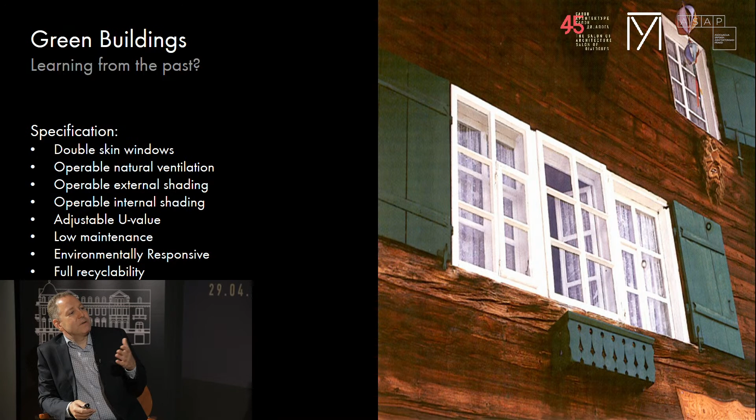You have low maintenance. It's relatively simple technology. It is environmentally responsive. It's all made of wood and simple glass. Almost full recyclability, at least of the metal parts, and biodegradable in terms of the wood. So if you put this specification down for a modern facade system, a lot of contractors would fail.

So it's a bit of a question: can we pick things? Can we learn from the past?

Also looking into the CO2 emissions from such a building—usually they had a kind of barn, or they had animals. Usually the animals were in the basement or ground floor, then the living rooms or bedrooms were above. So the heat from the animals, the cows, pigs, whatever they had, was going up—it was natural heating. They were very smart in positioning: where's the barn, where are the people?

Now this whole building was run with one single stove in the center. So people were sitting around—maybe this laser thing goes here—sitting around the stove. They just had one fire heating up, or more or less heating up. Still not the thermal comfort that we would have nowadays. But this building was so environmentally friendly, I think nowadays we would struggle achieving that.

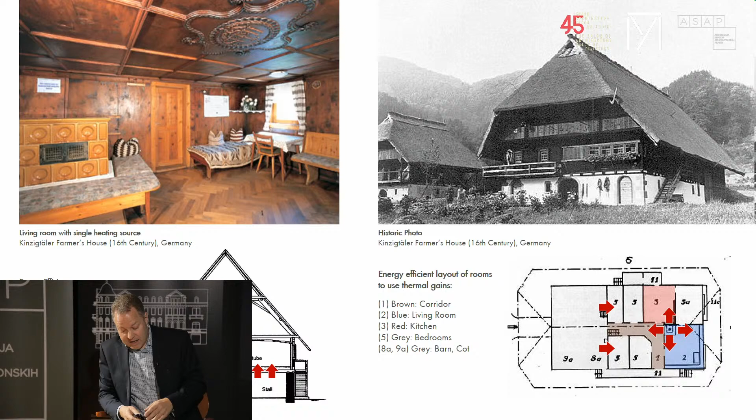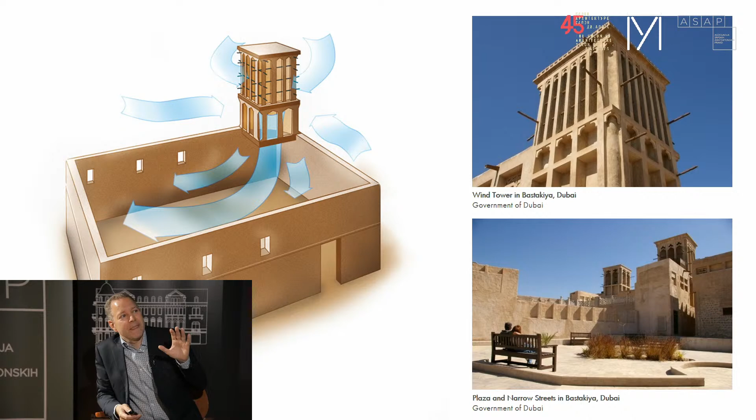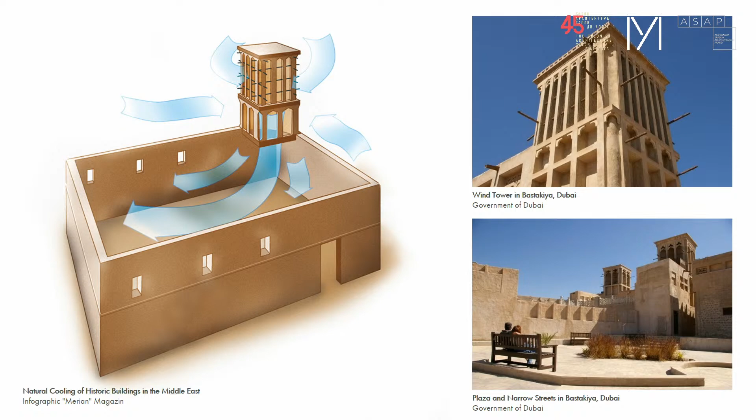So going from cold climates like Central Europe to hot climates, what did people do there in the past? Very similar approaches—it was about understanding nature, understanding physics. What can we do to enhance the thermal comfort of human beings? This is quite key also for nowadays design. If we want to make things better, we need to understand how the human being works.

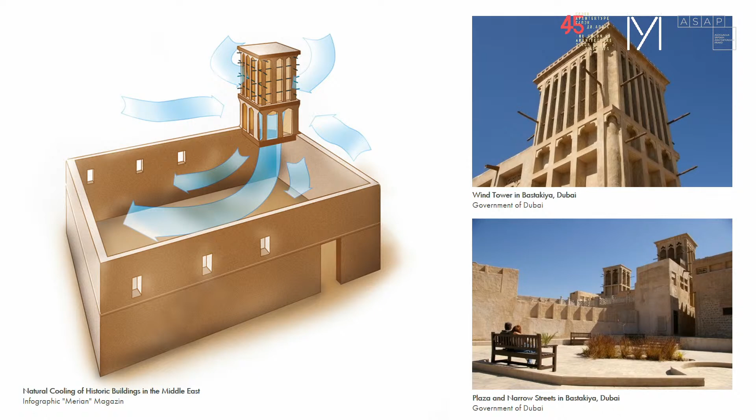This is an example of the traditional wind towers built in the Middle East. During the summer, it is extremely hot, so you're trying to harvest the wind, collecting it from a higher altitude, bringing it down into the traditional arabic courtyard. This wind flow makes it at least a little bit more comfortable in terms of thermal comfort for the people. Low tech, built centuries ago.

About shading, they didn't have glass in the past, so they did this kind of so-called mashrabiyah screens. The mashrabiyah screens provided privacy and let air go through the screen, continuing this idea of wind flow.

In the old Arabic cities, the buildings were built very close next to each other, so the pathways were shaded. It's about shading. It's showing that people in the past had an understanding of how they could make the world a more comfortable environment.

This is a very nice graph that I like to see. It's shortly about, during the Second World War in the United States, they did some experiments about thermal comfort of human beings. This graph also throws me back to when I was doing presentations, for example, in Saudi Arabia, about sustainability.

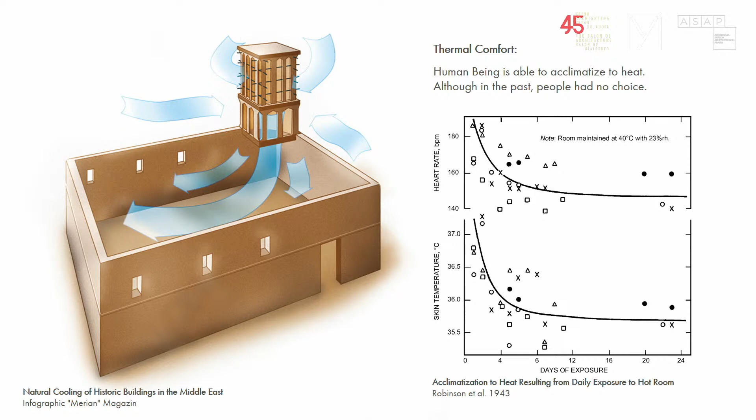There were some old local people from Saudi Arabia standing up and saying, oh, this sustainability, air conditioning, is all modern, we didn't have it in the past. So people survived without air conditioning in hot climates in the past. How did it work? Nowadays, people would complain immediately.

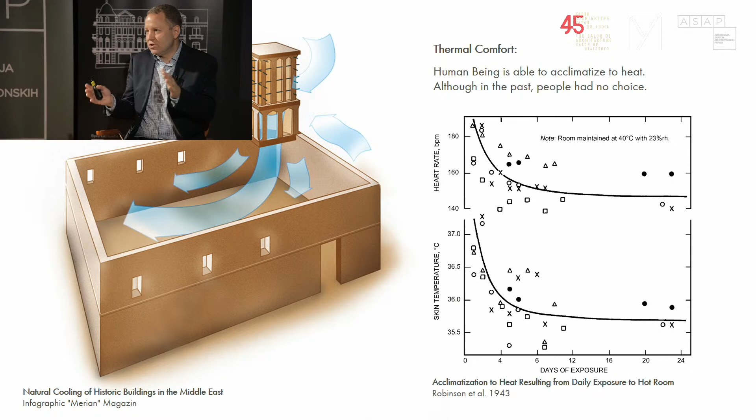This kind of graph shows people were put by the US Army into a kind of climate chamber, a big room, and the room was actually heated up. You can see on the left-hand side the skin temperature and the heart rate, and then the days of exposure.

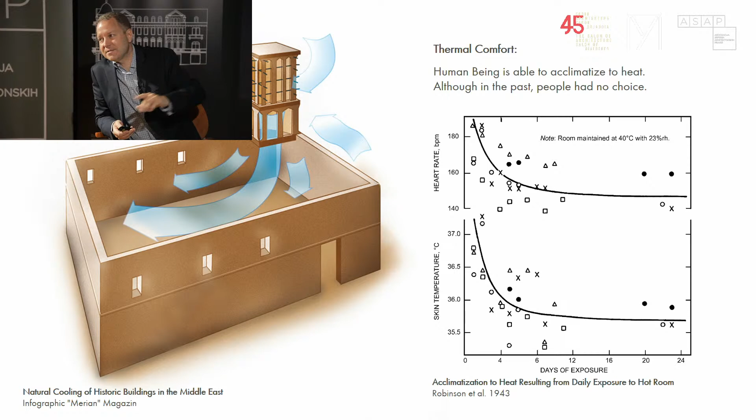You can see that the first 4 to 6 days, people were stressed out, so the heart rate was high, you were sweating. But then human beings are able to acclimatize, so your human body acclimatized to high temperatures, the same also for cold temperatures.

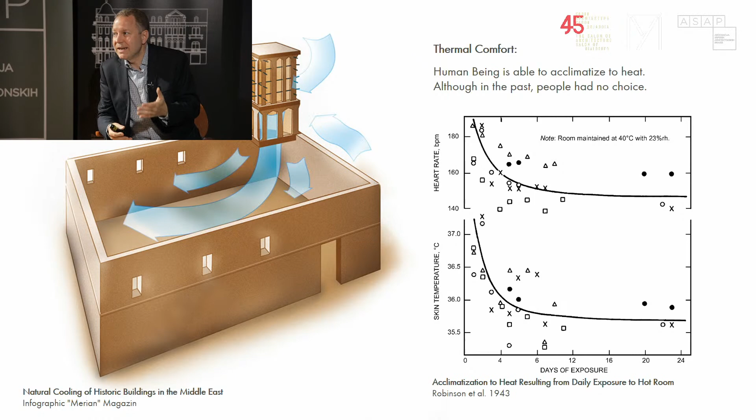This is how the people survived in the past, because you just have to pass through 4 to 6 days, and then your thermal comfort is getting better. But nowadays, people are no longer willing to do it. People are sweating immediately.

Air conditioning in your car. You drive your car, oh it's hot, air conditioning; it's too cold, switch the heating on. So people in the past were more willing, or more used to withstand heat or cold. This is quite important to understand.

So we as human beings, we could go back to these kinds of designs, but do we want to? This is another question, a bit more about our society.

Now taking the steps further, learning from the old traditions. This is a project in Riyadh that we just finished the design on. In Saudi Arabia, we see a lot of movements nowadays, they're building a lot of new houses, new cities, because the population is quickly growing.

In these hot climates, we try to achieve a more comfortable outdoor climate. This design involves a huge shading canopy with integrated wind towers to create outdoor thermal comfort so that people can walk along the streets, even in the summer, more or less comfortably.

You can see this whole design, a complete new kind of city, or half of a city that's built. Between the buildings, between all the retail shops, houses, and so on, we want to go away from this car society, because currently in the Middle East everybody's driving a car because it's hot.

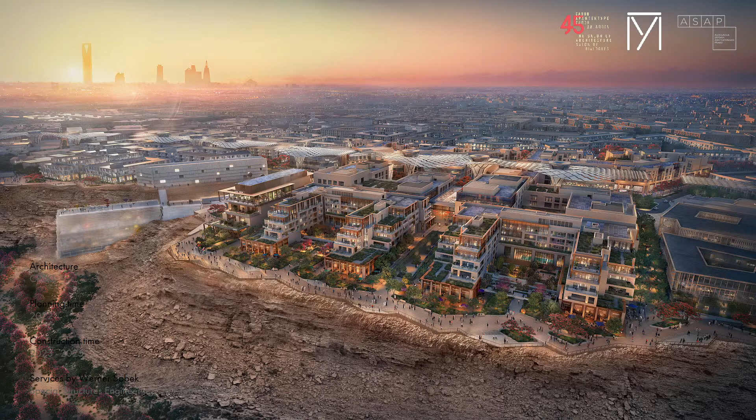But if we achieve that, we're getting the buildings closer again, so that you don't need cars. Then people are able to walk outdoors in a thermal environment that is comfortable, even in the summer, with less sweating — then we achieved quite a lot.

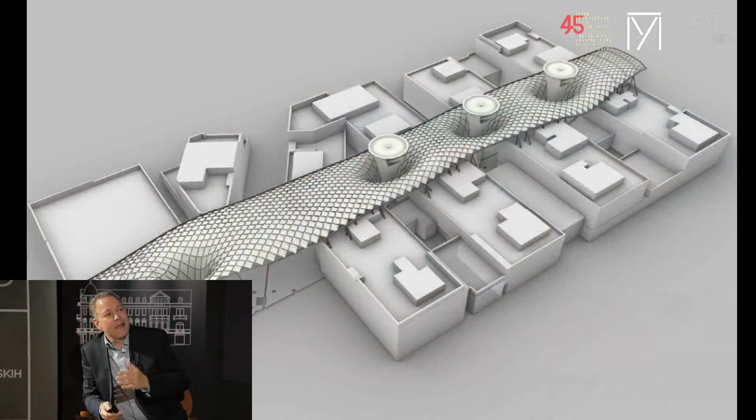This design involves wind towers, which are cantilevering out from the ground, getting wider at the top. They're collecting the wind from the two main wind directions and funnel this wind down. At the same time, we have this kind of shading canopy to provide shading. In terms of design, we designed this big grid shell structure between the buildings, supported on the buildings.

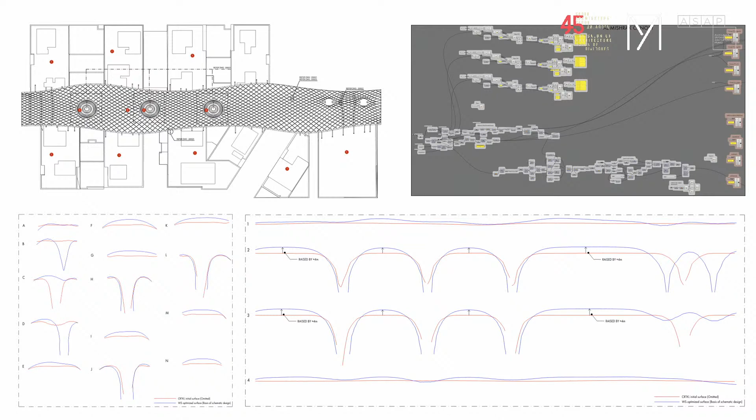Going to the next slide, it shows a bit of the technical complexity behind these things. If we do design nowadays, especially for freeform structures or these kind of shapes, we optimize them first architecturally. The architect has to say how the geometry looks like. But then we also want to build an ideal grid shell structure, ideal arches, so we modify the geometry for a structurally more optimized result.

All of this is run in parametric scripts, so we're fully working in Grasshopper with Rhino, because otherwise these kinds of structures in 2D you cannot design. We call this approach CAD to CAM, computer-aided design to computer-aided manufacturing. This involves that nowadays we even pass on the 3D models from the designers, the architects, the consultants, to the contractor.

We did certain studies, and with the help of a CFD consultant, we've seen at which times, at which times of year, we are enhancing the outdoor thermal climate. You have to be realistic—you cannot achieve that the whole summer in the Middle East becomes nice with these kinds of things, but we are actually enhancing it.

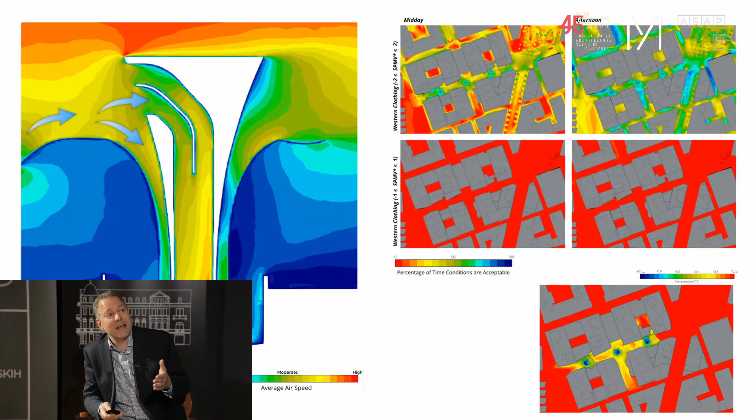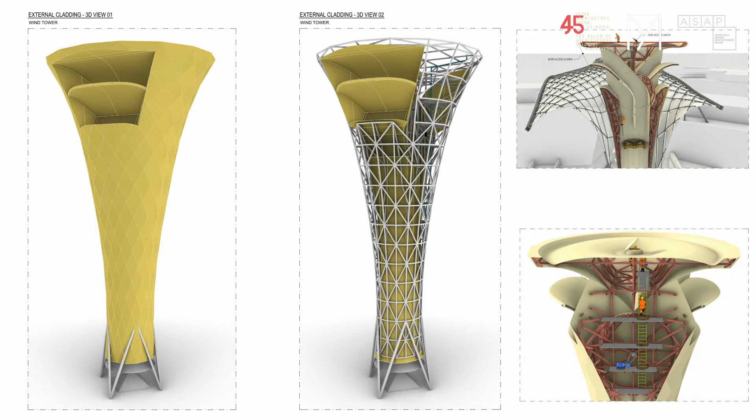Within these wind towers, at the top right corner—not shown here—we even included fans in case there's no wind flow at ground floor. So we included electrical fans to create artificial wind, blowing air down. At the same time, we have water spray systems included in these wind towers, using so-called evaporative cooling. We spray water mists into the airflow, and the natural effect of evaporation cools the air down. It also slightly increases the humidity levels of the air, but it's working.

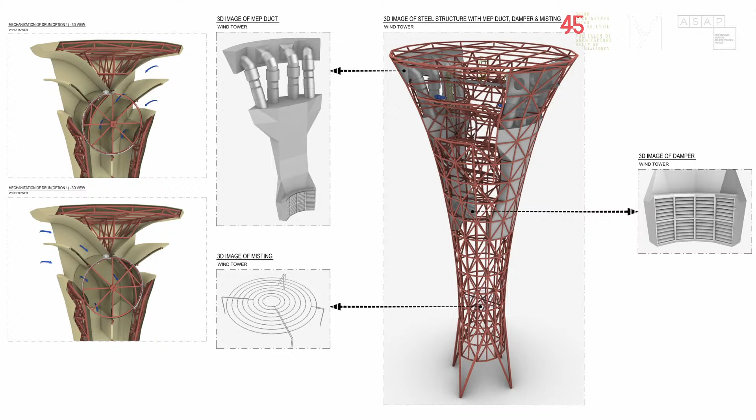This involves us having to scratch our heads because all of this is unique—no one has built it before. This is where we, as ASAP, step in and take on the challenge to design these unique things. We designed all of the mechanical parts, the rotating drum, the mechanical equipment, the steel structure, so that we were able to pass on the full design to a contractor to build it.

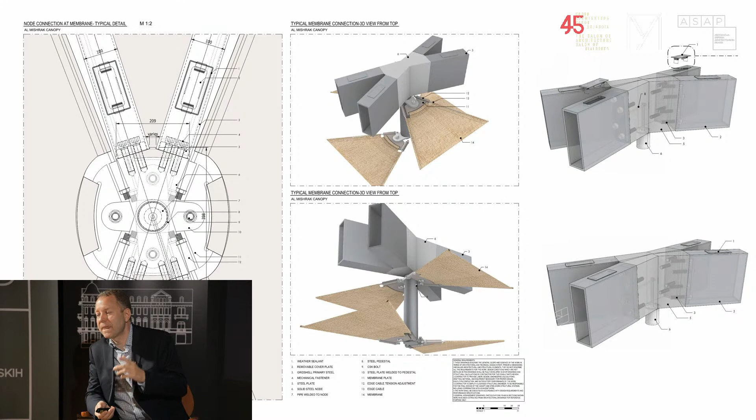Talking about the shading, as I mentioned, it's a shading structure. Usually our grid shells need to be lightweight because we're talking about big structural spans. This grid shell has a span of over 60 meters, a 60 meter clear span, and we're realizing this clear span with a steel box section of 300 millimeter height. So the span to structural height ratio is amazing, but to achieve this we need to be efficient.

We need to be efficient, first of all, in terms of weight of the materials, and the most efficient materials are, of course, tensile structures. So we used fabric, stretched fabrics, and tensile cables to achieve the shading. At the same time, we optimized the geometry to achieve a perfect arc, which was already done by the Romans.

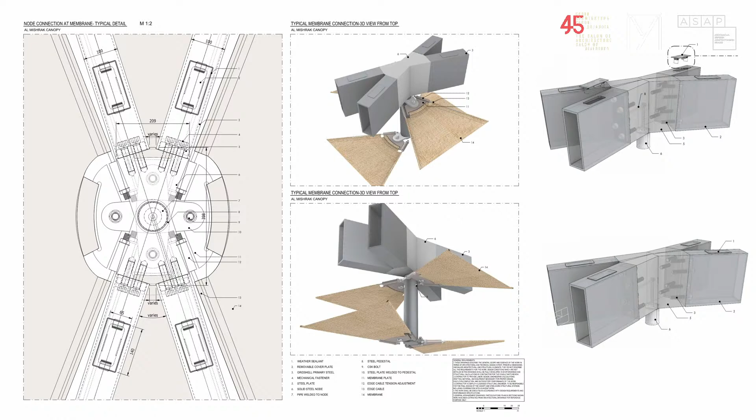Perfect arches—we then designed a so-called grid shell system with nodal points that take on all of the different angles, which are actually CNC machined. You can see it on the right-hand side, showing one of these typical nodal points of the grid shell structure. This then all bolts together.

These kinds of systems, for us, are a step forward. We're combining old design ideas with very modern technology, doing it on a bigger scale, and trying to enhance the world, make it a better place for people to live. If they want to walk out in May or June in summer, it's still a nice climate, or more or less a climate where we can sit outside.

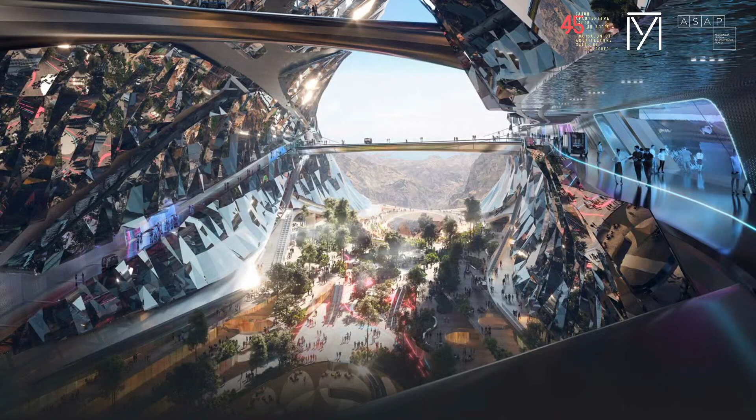Talking about this Middle East project brings me to my next one. We're currently the facade consultant on the Neom Trojena Vault project. A lot of you might know the Neom development in KSA. Saudi Arabia is a fast developing country, and the population is growing. This Trojena Vault is a project at 2,000 meters height. We're currently involved in this so-called Vault project. The Neom Trojena development is on top of the mountains, which won the bid for the Asian Winter Games, so they're going to host winter games in this area. They also have snow for certain days, so it gets cold there.

The background is the following: this is intended as a kind of destination. As I mentioned, during summer it's quite hot, but at 2,000 meters height it's about 10 to 15 degrees less because of the elevation. So just by the location, you achieve better outdoor thermal comfort, and you also require less cooling load because you're 10 to 15 degrees cooler than at sea level.

Now the whole design for the Vault includes building almost half of a city into a mountain. Usually the mountain gives some thermal mass. It's a bit similar to sitting in a very old building, like an old church, where the walls are like 2 meters thick, and during summer it still feels cold because of that large thermal mass. It's a similar approach here, where the mountain helps cool down the interior space.

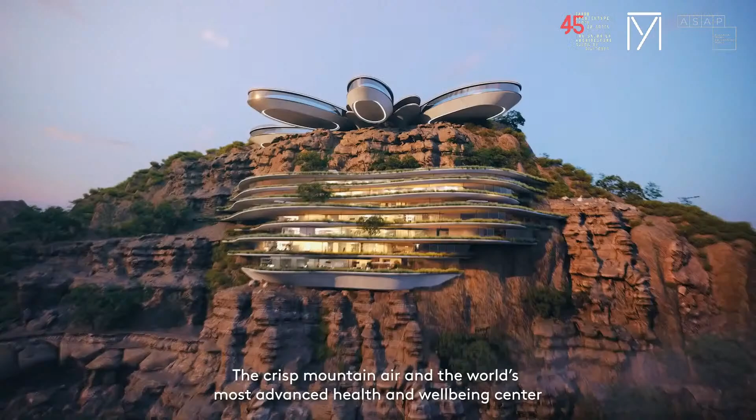Journey to new heights, a unique global destination driven by cutting-edge technology in Neom. This is Trojena. Breathtaking architecture and innovative engineering fold seamlessly into the natural landscape, ascending to a vertical village, a portal connecting the digital and the physical. The seasonal climate provides a multitude of high-altitude adventures in the Arabian Peninsula, with the region's first outdoor ski experience. Enjoy the buzz of world-class entertainment, the crisp mountain air, and the world's most advanced health and well-being center, nourishing both body and soul. And as night falls, you can witness the stars as you've never seen them before.

Welcome to Trojena, on these mountains of Neom. We're currently involved in this Neom Trojena project, which involves renowned architects. The project itself has extremely high sustainability goals, achieved through a multitude of measures.

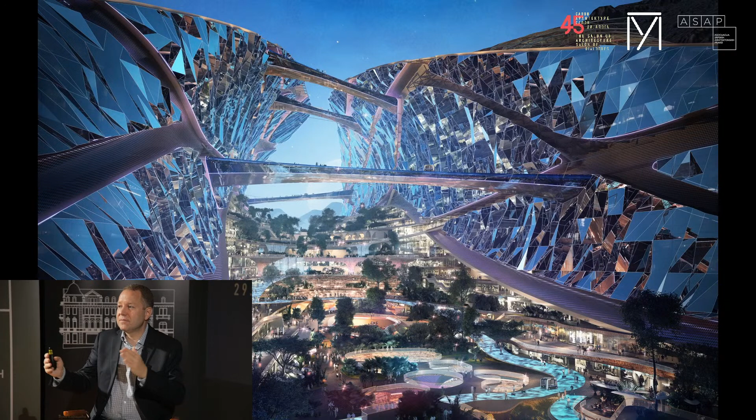This is the so-called void facade. You can see that our facade curves in from both sides, facing the rock on both sides. At the top we have a big roof, partially covered with PV panels. The central void area already achieves a high degree of shading, and we achieve a high degree of natural airflow through this void because it's open at both ends, even at the top of a mountain.

This shows a bit of how we go into the details. This is a typical facade system, which has a lot of unique different angles. So getting this technically feasible, getting it built, getting the design out, and getting contractors bidding for this job is quite a challenge.

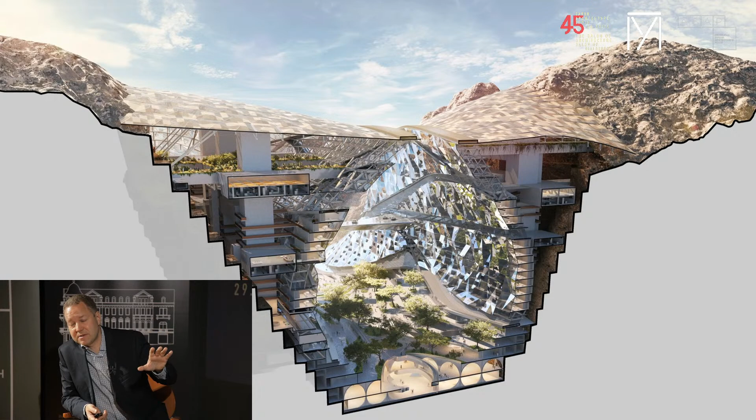As I mentioned before, the design of this project is almost half carved into the mountains. You can see the mountains on the left and right hand side. We then see the so-called back of house, which even includes gardens. There's a goal to include gardens where we harvest crops, with some salad and lettuce intentions there. And the rocks themselves emit cold because they're a big thermal mass.

The roof itself provides shading but also includes PV panels, or photovoltaic panels. We want to generate a certain percentage of the electrical demand by ourselves within this kind of building.

The vault project will be the main transportation hub for the Trojena development, so all of the cars will go there. There's a tunnel going to this building, and a kind of pathway down to the lake, which will also be green and so on. It's quite a unique, quite a stunning project.

This is now a longitudinal section through the project. You can see the scale - it is massive. From the top, the project is actually intended to mimic the rock so that the architectural impact, the visual impact, is less.

It shows new ideas for how we can develop more sustainable cities. And it's not starting with small steps, it's starting with big steps. We're starting by doing something completely different - for example, carving half a city into a mountain.

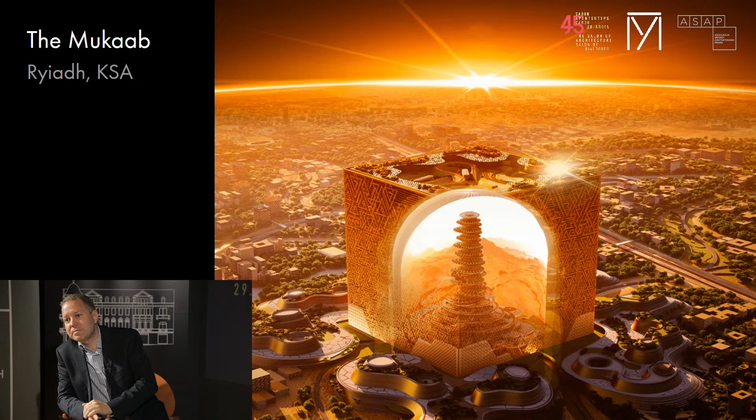Another project currently in the press, called the Mukaab in Riyadh, is another landmark project in Saudi Arabia. The intention is to build a 400 by 400 by 400 meter cube - a box. It will be the world's biggest building, even bigger than the Pentagon. The idea is that inside this box building, we're building another building, a tower that is 330 meters high. Around this interior tower, there's a plan for the world's biggest video projection area.

The whole development is the center point of a whole new city development called the New Murabba. The project itself is one of these completely new ideas. If we talk about sustainability, how can we design a sustainable building in both hot and cold climates? It starts with very simple things.

It starts with what we call the A to V ratio - what is the external surface area, the building envelope? For example, if we take a box, we have the sides and the top - that's the envelope. Then we have the volume of the building. A building is more efficient the better the A to V value is. For example, the best shape is a ball, or a circle-like box building.

But if you build a flat building, it's usually pretty bad, because you need to cool down the interior space. The less surface area you have - the less facade and roof area - the easier it is, because facades and roofs have a poor U value, so all the heat gain or loss is through your building envelope. If you minimize the envelope area compared to the volume, it gets more efficient. This is why a single-story building is usually not efficient - you want to put floors on top, because then you get a box shape that's more efficient.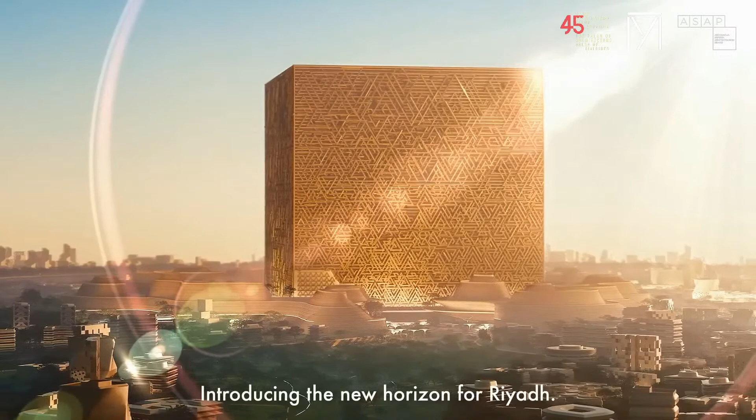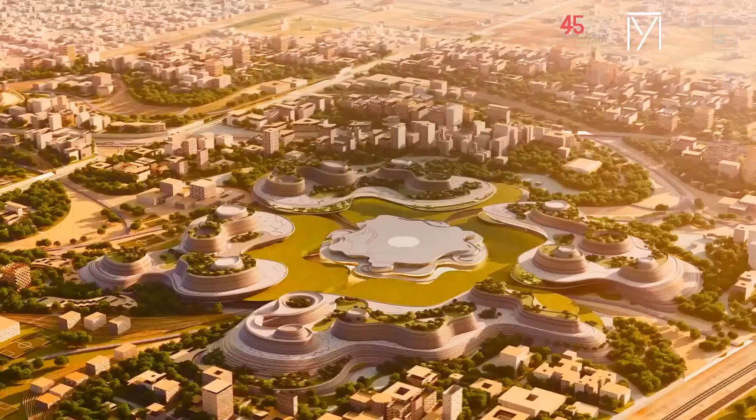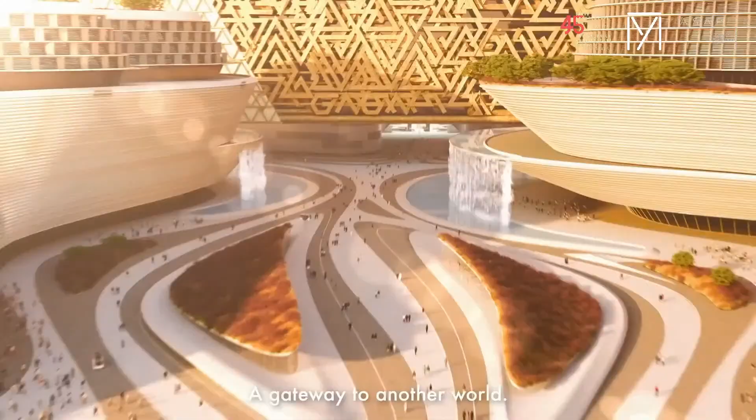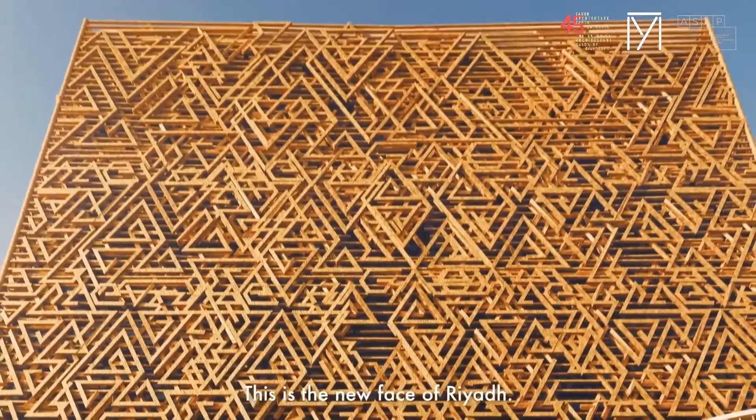Introducing the new horizon for Riyadh, a new icon, the Mukaab, the world's first immersive experiential destination. You're going to have 4 corner towers and a big roof. Step inside and it's unlike anything you've ever seen, at a scale that's unprecedented, big enough to hold 20 Empire State Buildings. Where you and those around you enter a new reality, transporting you to Mars one day and magical worlds the next. Where your retail experience is completely reimagined, and hospitality, leisure, and entertainment reach new levels, all in breathtaking, ever-changing environments. This is the new face of Riyadh. Experience a new horizon.

So let me go back one slide to explain. What are the technical challenges here? First of all, we're building a building made of 4 corner towers, already 400 meters in height. We're then building a big roof on top, which includes, I think, a car racetrack.

We then have one facade on the exterior skin with a mashrabiya to provide shading. We then have the inner skin, which is the video projection area, which of course has to be almost seamless. It's a question of how we support it, what it's made of - most likely a membrane structure. So there's a lot of questions, a lot of new design approaches we have to take with these kinds of projects. It's quite challenging.

And we're going to see how it's... Now going on to some projects currently on site. We're currently the lead consultant for the Wasl Tower in Dubai.

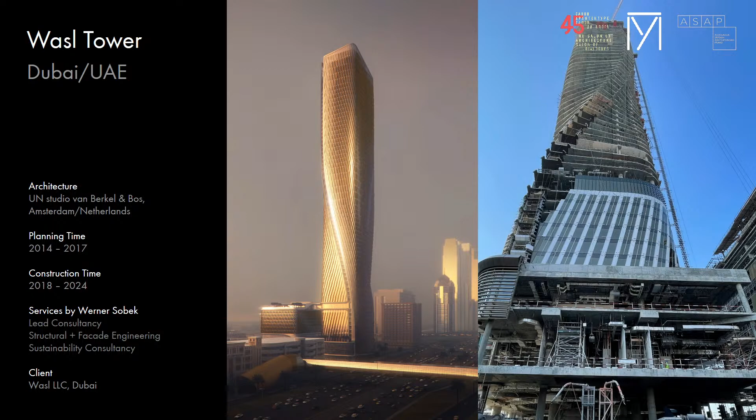So coming to a bit more traditional design - this tower is going to be the world's tallest tower using a ceramic facade, including terracotta. Terracotta is a very old traditional material, like porcelain, invented by the Chinese ages ago, and this is going to be the cladding for the exterior sunshade elements on this tower.

Talking about the challenges, this is one of the projects that were fully developed in 3D together with the architects from UNStudio. We spent quite a lot of time designing the right amount of exterior solar shading in combination with the glass, which has a solar control coating. It's a kind of combining measures to reduce the solar heat gain, which is the main factor of cooling loads in the Middle East.

I want to go on to some other projects we did over the last years. We've been the lead consultant for all of the shading structures for the Expo 2020 in Dubai. We've been the engineers, but also the architects, for these so-called retractable shades, the flying bird shades, and also some green, natural plant shading.

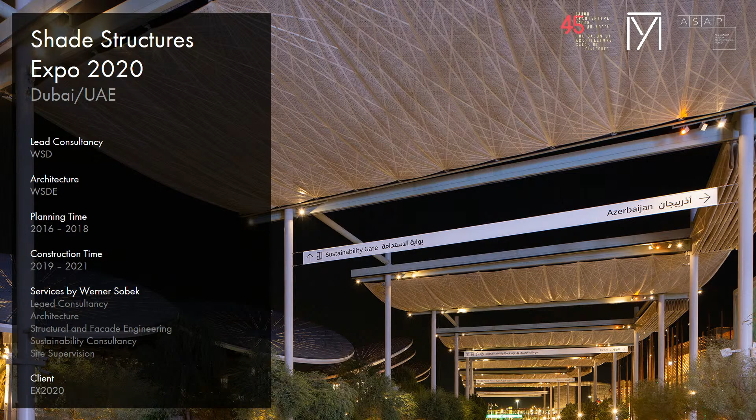As I said before, a similar idea as for our project in Riyadh, with a different approach. For the Expo, you have a lot of these pavilion buildings and people walk between them, so it was a major task to create a comfortable outdoor environment, thermal comfort for people walking between the pavilions. At the same time, there was a clear intention by the client that during night times you want to see the stars, so we had to design something active, where the shading can be open or closed.

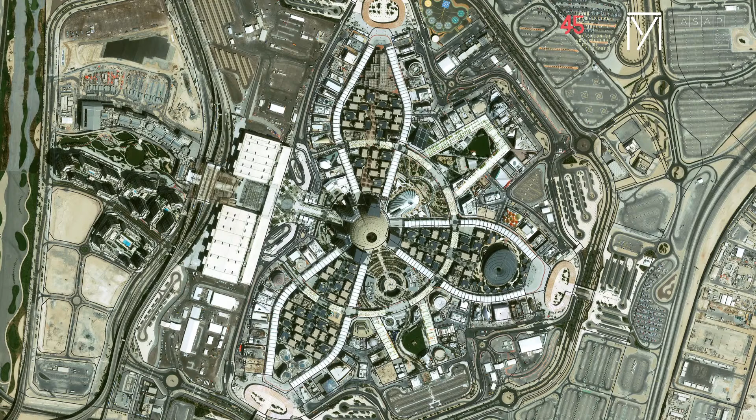This is the design that we came up with. You can see here a bit of the scale - the white areas are all the shading membranes, and all of the dots are the buildings. It's a massive scale, a huge development, an expo. All of the shades are retractable, so during night times they were opened or partially opened with lights on.

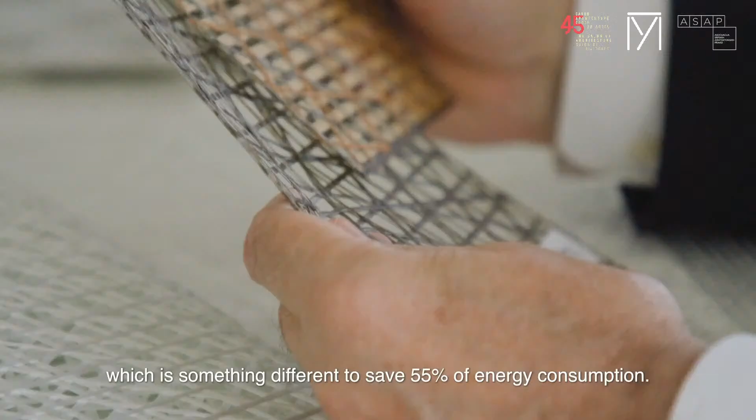In terms of the design of these, I have one video from Professor Werner Sobek: that we have to reduce dramatically the emissions. The announcement is to reduce CO2 greenhouse gas emissions within 10 years by 55%, which is something different from saving 55% of energy consumption - this is even more difficult to achieve.

Everyone underwrites that, but nobody really makes clear to himself what that means. Because if we are not capable to change the technologies we use to produce the materials, to build the buildings, to run the buildings, and to demolish them, then in 10 years we are allowed to build only 45% of the amount we are actually building. That means half of us would become unemployed.

Standing in front of a problem which says either you change everything or you cannot build in the way you build nowadays will urge this interdisciplinary process, where people start talking to each other and say either we invent something or we are lost.

Now, talking about sustainability is also the amount of material that we use. To create shading, for example, you can do this kind of shading as a concrete slab. But what's much more efficient is that we minimize the design, a minimalistic approach, and save material. These shading fabrics are only 2 or 3 millimeters thin, so in terms of material and weight, it's almost nothing.

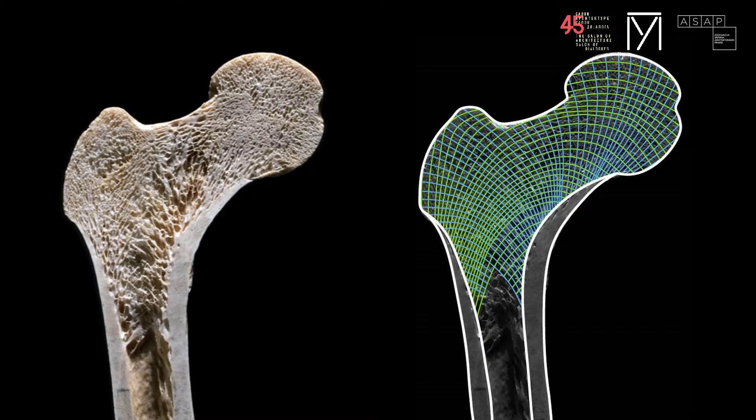So nature shows us this. On the left hand side is a kind of section through a bone, and on the right hand side is a finite element showing the lines of stress pattern of compression and tension. A similar approach goes back into these fabrics.

We have the main points where the fabrics hang from the steel frame on tracks. From these points, which are points of stress concentration, we orientate the fibers in a direction toward the next support point. So we're designing a fabric that is perfectly optimized for minimalistic material, and at the same time it gets an architectural quality because we are visualizing the main stress directions, which a lot of people say looks good. I'm not an architect, but hopefully a lot of you will share my point of view.

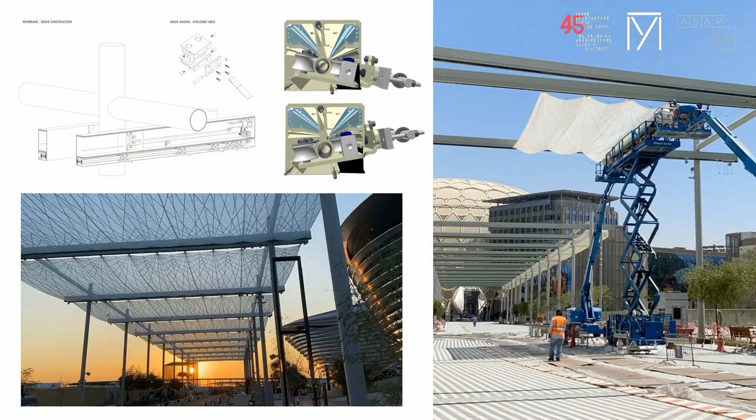Now, going on about the technology, of course we had to design all of the tracks, all of the mechanical equipment, all the motors, the rails, the gear, and so on.

The expo took a bit longer than expected because of COVID. It started late and ran longer, and these fabrics are still in operation nowadays. They were designed as a temporary structure, but now they've been running for almost 3 years. So we're quite happy with the project, it worked out really well, and people tend to like it.

This shows a video, a bit of fast motion, of how the fabric retracts and gives a clear view to the sky.

Now talking about fabrics itself, and maybe this is a bit of a future trend, what we see is that we will build more with lightweight, translucent materials in the future.

Why? Because we want to save material. We want to go to new shapes. Architecture is moving toward more complex curved geometries. If you want to create curved geometries with traditional materials like flat aluminum panels or concrete, it's really difficult. Fabrics, you can easily stretch in the way you want.

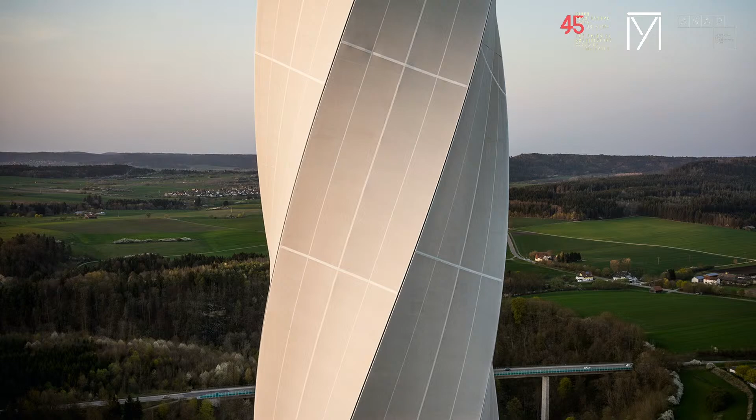This is the ThyssenKrupp test tower, an elevator test tower which is the world's tallest fabric facade built so far. In the end it's quite a boring building, because it's just a concrete core with test elevators, and we had to clad it in a nice way. Otherwise I think the local government wouldn't have accepted this tower. But it shows a bit of the beauty of this material.

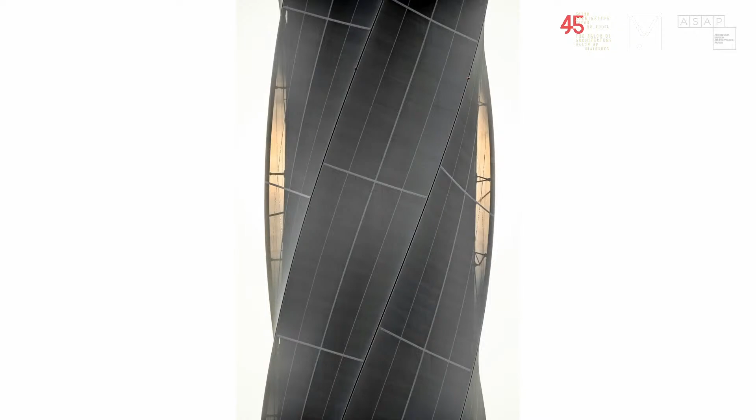In the summer and the winter, it picks up the light, picks up the shadow. It's even translucent, so if you look against the sun, you can see through the fabric. This whole design with fabrics is amazing, because it gives you the opportunity to create something translucent that could also be permeable. The whole idea of permeable systems, systems that let air pass through, provide shading, privacy, and ideally also a certain thermal performance.

This slide shows some research, because we are closely collaborating with the University of Stuttgart, with the ILEK. This is currently a research project by the ILEK, about a kind of filament, I would call it. It's a lightweight facade system which uses microfibers in a kind of mesh with a certain density.

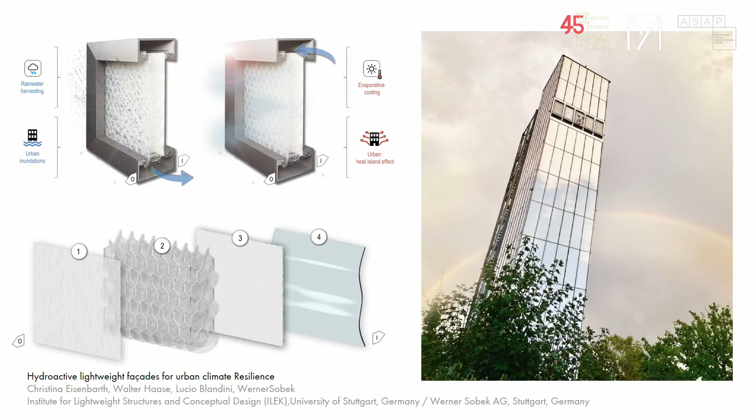You spray water, or let water run through the small fibers from top to bottom. At the same time, if there's strong rain, the system can harvest the rain. So there are different layers of the system, and the next slide shows the main principle.

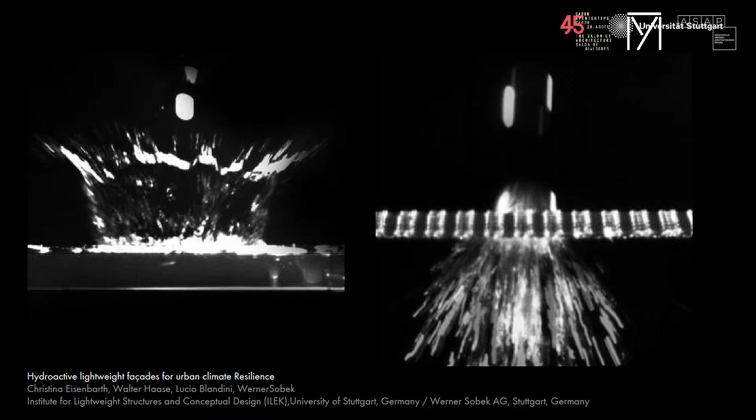This system is a bit similar to what I showed previously with the Al-Mishra canopy in Riyadh, with the wind towers where I had a water spray system. It's about evaporative cooling—using water to cool air down. It's a similar system, but we're not using a mechanical system, just water which runs down on these microfibers.

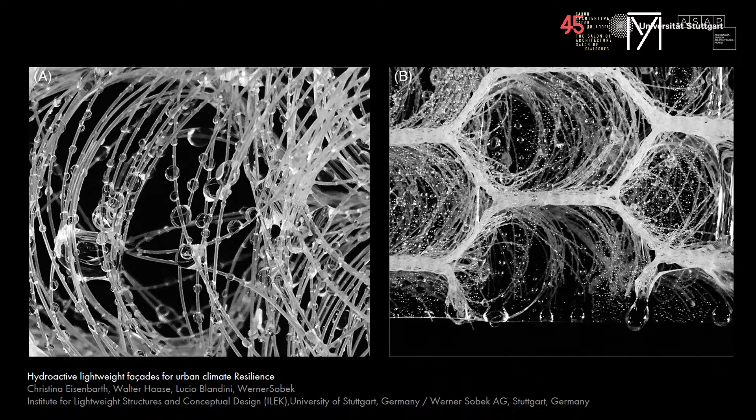This is a close-up macro photo of these microfibers. They're extremely small, and tiny water drops start sticking to them. You let this water run onto the microfibers, and they easily evaporate into the air, so you get evaporative cooling by the natural airflow through this open material.

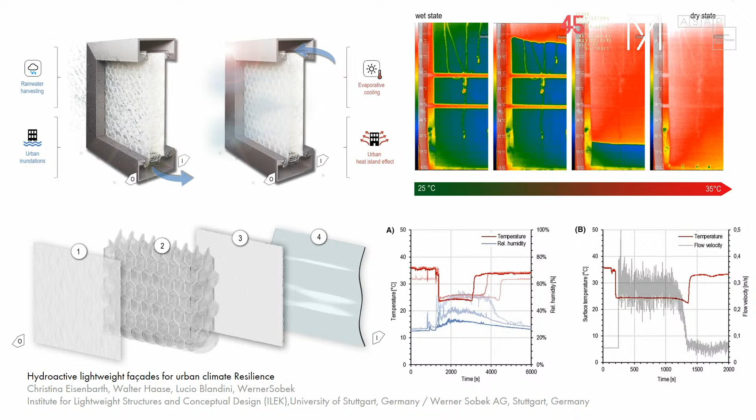This shows some current testing on the right-hand side. In the top right corner you can see the drop in temperature due to the system—the green arrow is about 25 degrees Celsius and the red arrow is about 35. On the right-hand side is the whole system when dry, no water running on it. On the left-hand side is the wet state. You can see we're able to cool down the air by about 10 degrees Celsius with a relatively simple system, just using water and natural airflow—no electricity, no compressor, no mechanical system.

This is a way forward. Our future might be a combination of very complex systems, as on NEOM, but also very simplistic systems like these. It's about getting the ideas out there, doing the testing. All of this starts with understanding the physical principles, understanding how we can make this world more comfortable for human beings, and how a human being works.

This brings me to my next topic, which I'm currently researching a lot: human-centric design. Most of the slides I've shown before were human-centric, but now it's about light. This is a photo from 1920 in the UK, where babies were put out in the sun. Why? Because they figured out that if a human being lacks daylight, they get sick.

And light—there's a lot of things about light: natural sunlight, artificial light, treated with ultraviolet light. I'm going to go through this relatively quickly, and I'll explain later what this has to do with architecture and facades.

Because this is quite an important topic that we have to understand when we're talking about facade systems and buildings.

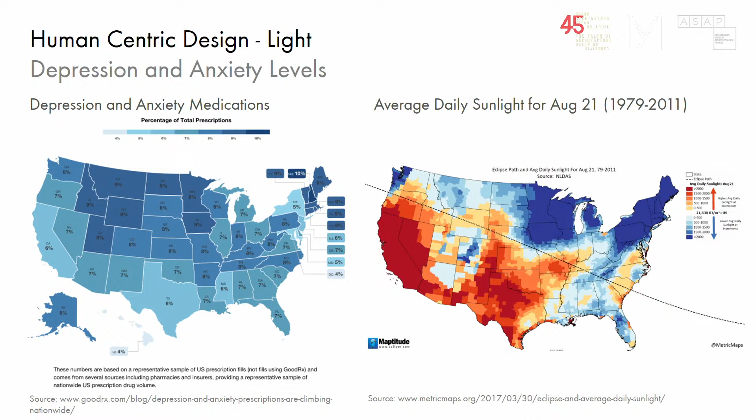On the right-hand side, we see a map with the sunlight exposure for a day in August. You can see that again California and Texas are the states with the highest amount of sunlight. So there's a clear correlation between sunlight and depression. This is quite interesting - it doesn't mean we all need to move to Spain or some very sunny country or Dubai, but it gives us a question mark about what we do.

We are all architects or building designers and engineers, and we're designing buildings. But we need to design the building for human beings. And we as human beings are different to what the human being has been in the past. Now we human beings, all of us, we became an indoor species. We are an indoor species.

We're spending 87% of our time indoors inside buildings, about 6% in vehicles, and only 7% really exposed outside. So the graph on the right-hand side means we're only 13% outside, including sitting in cars. Then about 60% of our time we're inside buildings, exposed to natural sunlight coming through glass, through our windows.

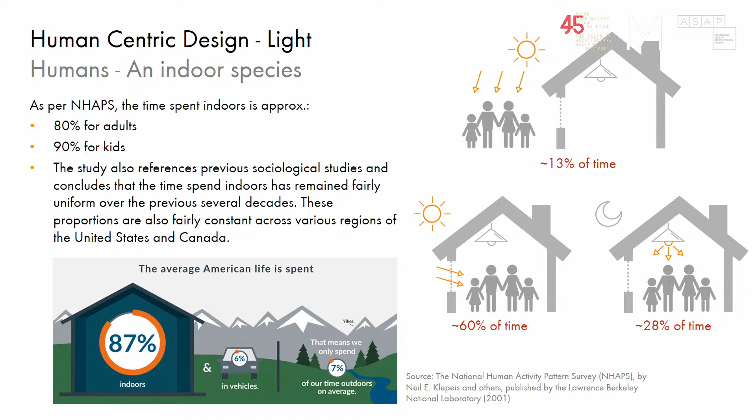And 28% of our time we're exposed to artificial light from light bulbs. This shows the importance of the whole topic, especially since COVID, the world is getting more depressive, as a matter of fact. So what do we need to do, or what do we need to consider?

Human beings evolved over millions of years under the exposure of the full solar spectrum of the sun. Then for artificial light, human beings started with candles. And I know it's not really about architecture, but I'm going to close the circle later on, how it comes back to the architecture we do nowadays. On the left-hand side, you can see before like 1960, it was mainly light coming through windows.

On the right-hand side, we see the transmittance through glass panels - what is the spectral transmittance through the glass that we had? This is a current very hot research topic, and we currently collaborate with a company called Guardian Glass on developing coatings on glass that are sustainable, but also take into account what we need as a human being, what kind of spectral data, what kind of light we need. Okay, let's go through this relatively quickly.

The glass in the past was just very simple clear glass. At the very top, you see the sun's spectral emittance - what is the sun sending out? There's a peak in the visible spectrum between 380 and about 780 nanometer wavelength - this is what the human eye can see. And why can we see this? Because this is a peak of the spectrum that the sun emits, and our human eyes evolved to be most sensitive in this spectrum because this is the maximum the sun gives us. So the human being adapted to the sun.

Now, is the glass adapting to the sun as we did as a human being? This is a question mark. You can see simple clear glass that we had in the past had a more or less horizontal, constant transmittance of the whole solar spectrum, including the long wave infrared heat. Now, when so-called solar control coatings were developed, these coatings get the U value down, or get the solar heat gain down, by reflecting the long wave infrared radiation back to the outside, which you can see at the bottom right corner - the infrared transmittance is pushed down.

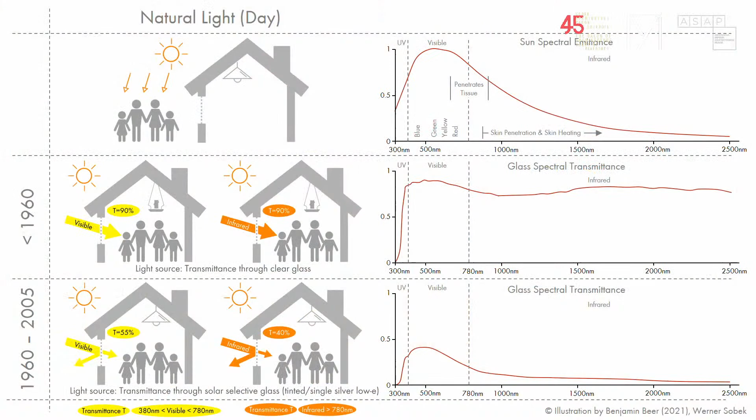Going on through all of the evolvement of coatings, from single silver, double silver, to the very modern triple silver coatings we have nowadays, it's about our glass transmitting only the spectrum of the solar that's visible to the human eye. So everything on the left-hand side, which is the ultraviolet, and everything on the right-hand side, which is the long-wave radiant heat, is completely filtered out. So we, the human beings, are getting nowadays through our modern glass panels no longer natural daylight - it's filtered daylight. And we cannot see it because it's outside our visible spectrum. This is quite important to note.

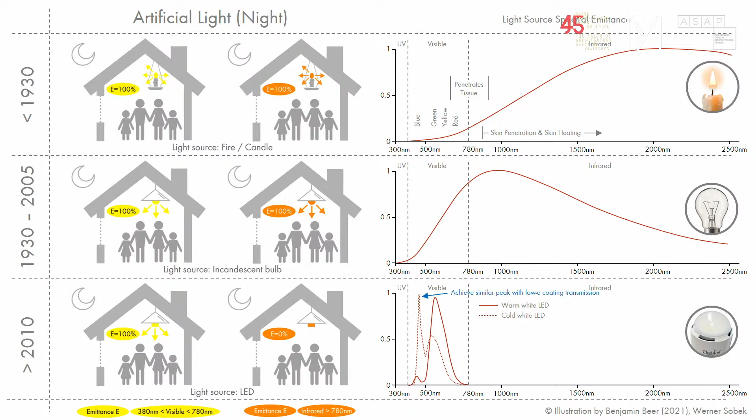So maybe stay with the slide. What shows you what kind of light do we get? We are spending 87% of our time indoors. But what kind of light do we get? Through our glass, it's filtered light. From our light bulbs, LED, it's also not the full spectrum. What is this doing to us as human beings? We don't know. It's a big experiment.

Talk about sunbathing and the spectrum. Why do people sunbathe? Would you sunbathe under LED bulbs? Would it be nice and comfy? No, because you sunbathe because you want to feel the radiant heat, the long wave infrared radiation. On the bottom left you see the penetration depth of the wavelength into the human skin, and only the infrared radiation penetrates into the skin. So you feel better after a week in Spain because you're exposing your whole body to this long wave infrared and long wave radiant solar radiation.

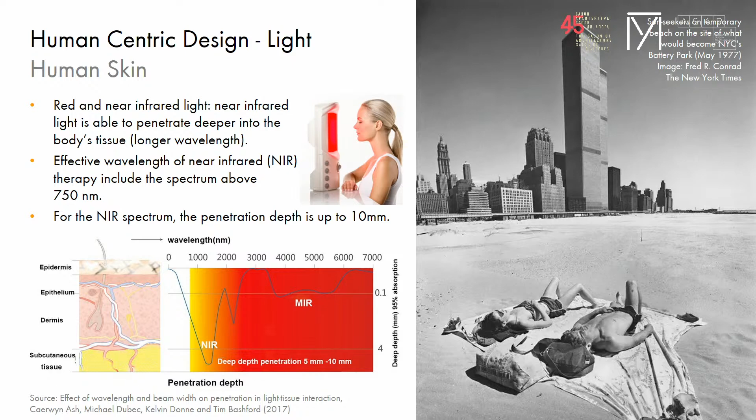Now, going on about light, it's also about vitamin D production - exposure to light helps your body produce vitamin D. The latest research in medicine shows, for example, a treatment against cancer with a certain red light spectrum, about 670 nanometer wavelength, applied onto the skull of your head.

Another thing about light brings me from the infrared spectrum to the blue light spectrum. This is currently also the research topic we're doing with Guardian Glass, about developing new glass that is more focused on human beings. This is a newborn baby - maybe a lot of your kids had this. The liver of a baby, which is supposed to clean the blood of all the stuff, isn't good - with a lot of babies it's not properly working yet.

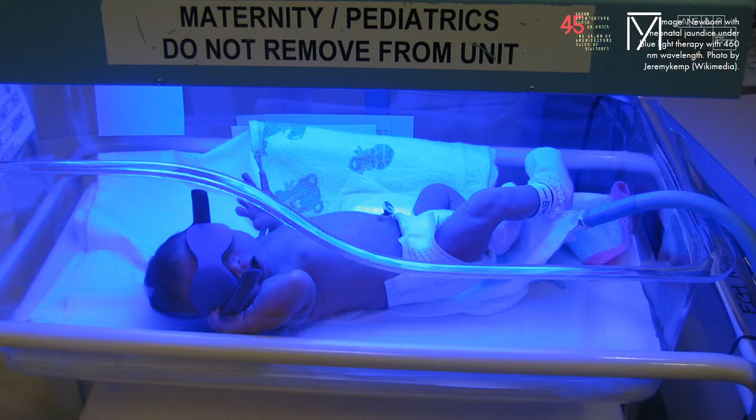So these babies are put into this kind of chamber with blue light. This blue light, with 460 nanometer wavelength, helps the skin perform a blood cleaning function. A lot of babies need this blue light for a couple of months, and then it's done - the liver takes over and cleans the blood. But it shows the influence light has on us as human beings, on our body.

Going on from the light - this is currently a research project with the ILEK. It's about light-emittance fabric, where we can emit light in wavelengths that we want. But let me go on talking about the blue light.

This topic is about wanting to wake up in the morning, all of us. How do we wake up? We need light. But what kind of light do we need? We need blue light. The sun on Earth naturally gives a more bluish light in the morning. In the afternoon, close to sunset, the light gets more red, more yellowish. So in the morning we need blue light to wake up, but in the afternoon we should no longer be exposed to blue light, otherwise we won't fall asleep.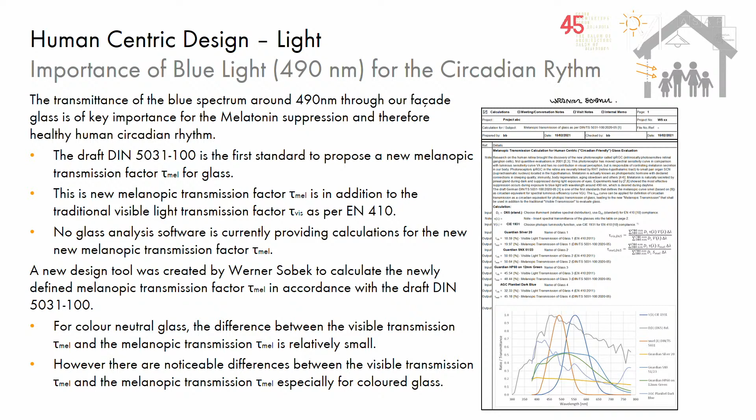This is around 400 to 490 nanometer wavelength, which is important for the so-called circadian rhythm of the human being - the day-night rhythm. We need this blue light spectrum for that. This is also part of the latest research and the draft DIN standard, where we now start classifying glass panels not only for visible light transmittance, but for the so-called melanopic light transmittance. Melanopic is the wavelength range important for the circadian rhythm, around this 490 nanometer wavelength.

I think I have a slide later on about this blue light spectrum, but all of you have cell phones, iPhones or Samsung, and all your phones have a night mode or a kind of blue light filter. This does exactly that - when you switch it on your screen gets more yellowish, so the blue light is filtered out. It's only done in the afternoon because you want to fall asleep. It's a well-known phenomenon.

Now, talking about the circadian rhythm and this blue light spectrum, this starts with the selection of the glass that has a high melanopic transmittance, meaning high transmittance in the blue light spectrum. For example, if we would choose glass that has no transmittance in the blue light spectrum, you're not waking up. You would see sunlight, but you're getting depressive because you're not getting what you need to wake up.

This then goes into the latest research about human-centric design as a holistic approach. So how do we design, mainly from the facade design and also from the interior design of a building and of rooms, for the human being? It starts that we select the right glass, that we're getting enough daylight coming through the glass, but this also continues that we're selecting the right wall paints and colors, what is then reflecting your light properly?

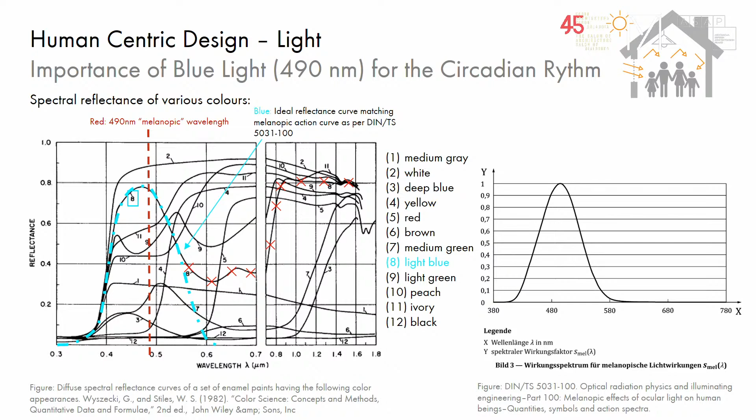Okay, now I want to go further. What kind of colors do we like? So we know we need the light blue, which is about 490 nanometers wide. On the right-hand side we see the wavelength, and on the left-hand side the color.

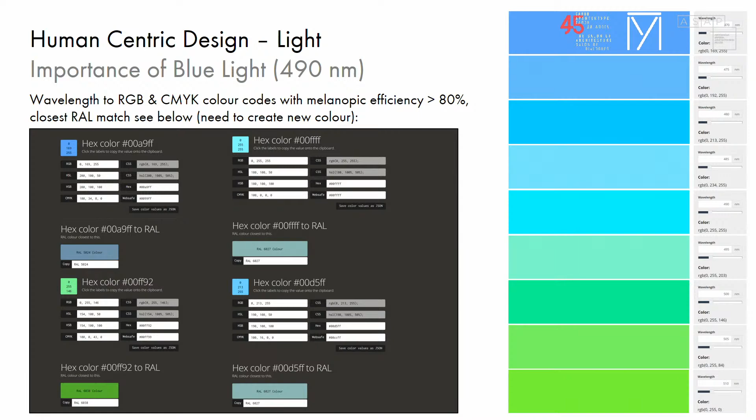This 490 nanometer wavelength is a kind of very light blue. If we go a little bit up, about 10 to 20 nanometers above, to about 500 nanometers, this is a light green. And usually what do people like? If you look out of the window, ideally we see a blue sky, light blue, and we see green plants, green trees. This is what we like.

And this goes a bit back to what we want to see, what our eyes perceive. And this comes also to kind of architecture, to a point where we say, okay, we like the light blue and the bright green. How does it revolve, or how does it reflect into our cities and also into the property market?

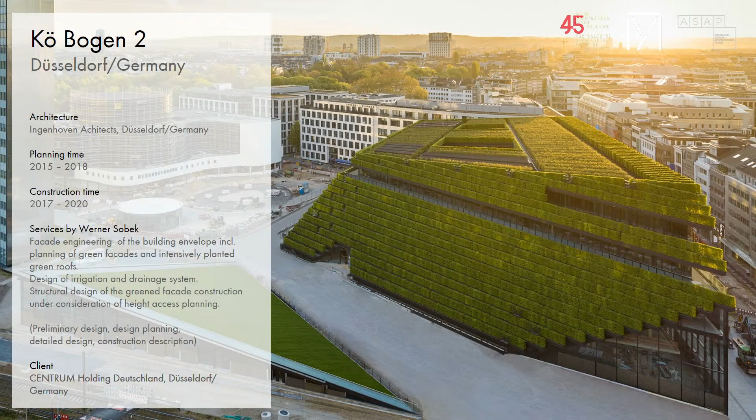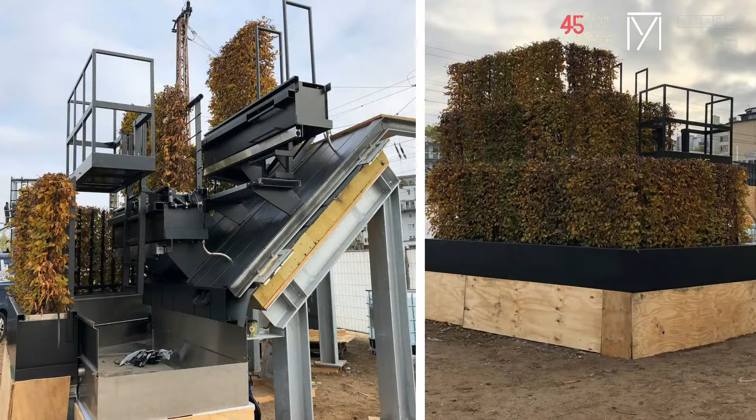Now talking about Kö Bogen 2, just some technical details. Of course, we have the plants, which are usually planted in long planter boxes off-site. There were studies with botanical specialists on what kind of plants to use. We did trials. You can see this is a kind of technology, quite often an opaque roofing system, sometimes including glass panels.

We then have the plants, usually bushes. We have a watering system, an irrigation system for water supply, and drainage with stainless steel pipes. Then everything is pre-assembled and comes to site, with trays installed on site, and then the plants craned into position.

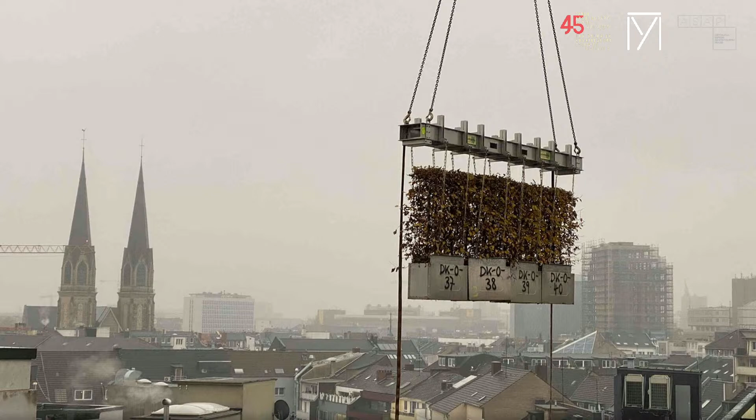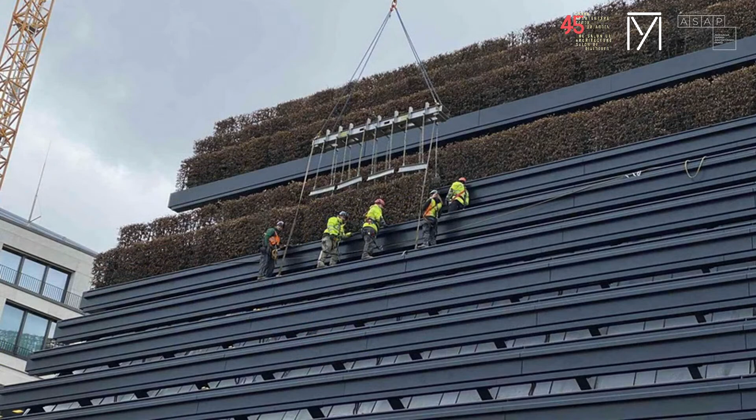On this specific project, the client wanted plants that are not green during the winter. Some plants are green, and this reflects the natural seasons, summer and winter. But then it got installed and came down, and you can see this is like a park view, but in the end it's a building. I think it's quite a nice approach.

Will all of our buildings look like this? I'm not really sure. In the Middle East, people ask me about this, and it depends on the local climate. This makes sense in Central Europe, we have a lot of water over here. In the Middle East, where there are no natural resources of water, this would not make sense.

In the Middle East, green is usually not really green. For example, golf courses use water taken from the sea via desalination plants, which take a lot of energy. So all of the water used in the Middle East has a high CO2 carbon footprint, whereas in Europe it's not so. For moderate climates like in Europe, this definitely makes sense.

Coming back to light and vision and sustainable design, nowadays sustainability tends to tell us we need to reduce the U value, so thermal performance needs to be enhanced. This is a bit of a contradiction to designing with glass, with light, and with vision.

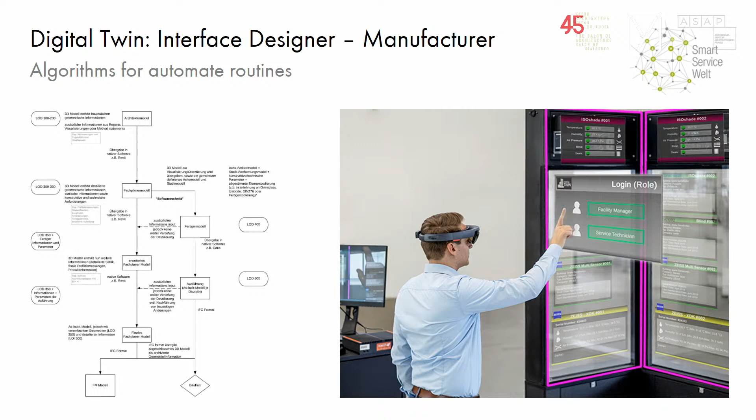This is an approach, and hopefully the video works, where we're using VR glass, because in the end it's about these modern facades, like at Deutsche Post Tower.

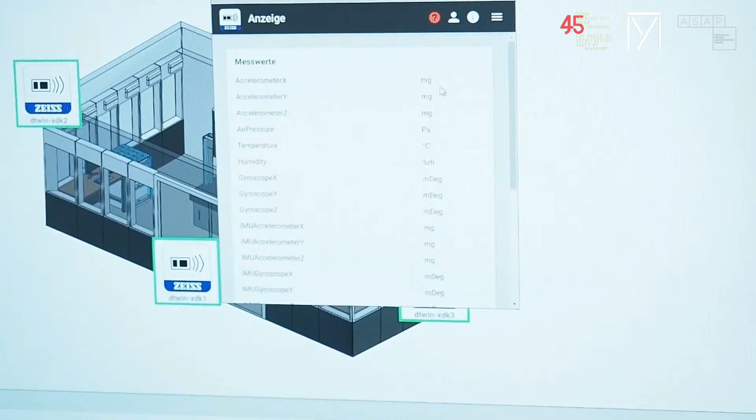It's all controlled so that the facility management system is getting smarter. First of all, we're getting active facade systems where the facades can actively react to, for example, sunlight conditions—if the sunlight hits the facade, put the shading down.

This is a system where facility management people can later walk through the building, and each unique facade panel has its own chip. Via VR glasses, the facility manager can log into the facade system and check it.

In a haptic way, with the fingers, you can check the current performance in terms of solar shading, U value, put the blinds down, for example. You can also check if the system has a malfunction.

If there are any issues, they can start certain functions. So it's a way that we want modern technology to become easier to use, both for the tenant and for the facility management.

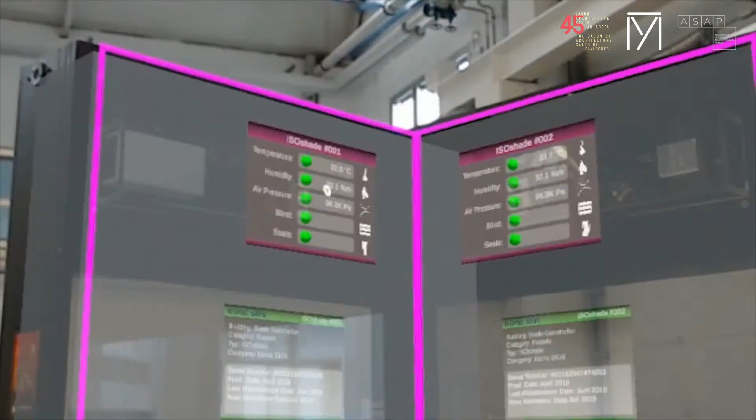Of course, you can see at the top the air pressure, humidity levels, and temperature levels. Once the facade system recognizes, for example, a very strong wind, the active flap in the double skin facade would automatically close to prevent high wind from going through the open flap.

This is a kind of shading system, humidity levels, and so on—a way that we want to control all of these parameters in a more holistic way.

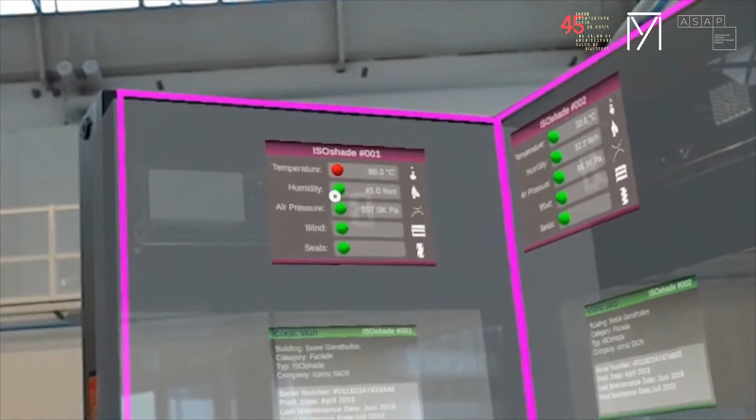Now, going on, and this comes to almost the end of my presentation—I hope I wasn't talking too much—it's about, again, about glass.

Personally, I've done a lot of research into glass—structural glass, thermal performance, light transmittance. I've been very enthusiastic about solar transmittance and spectral transmittance of glass. It's about what the future holds.

We looked back into the past, and now we look at what we're doing right now, including NEOM and some amazing projects we're currently designing. But what will be the future?

Will the future be that sustainability or sustainable design means building houses underground in mud and earth with small windows?

I think currently in architecture there are two different trends or paths. One path is getting more traditional, using things like mud bricks or more traditional building materials.

But the other way is a bit more high-tech, solving the problems through technology that human beings solved over the centuries through other means.

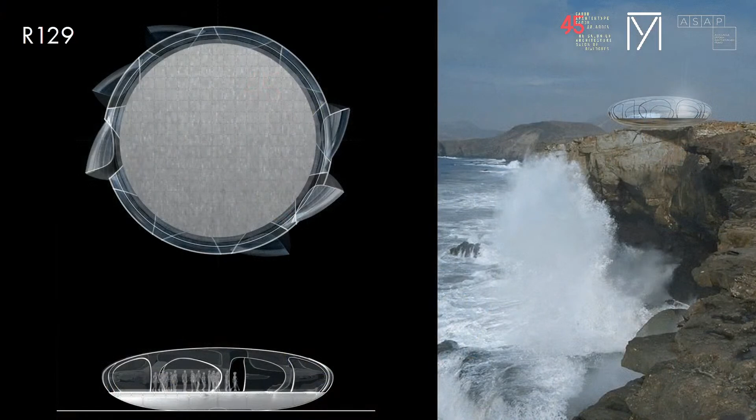This is the R129, a research project that our office has been running. The idea is that we're building a kind of glass shell, so that in the end we create a kind of monospace.

This monospace lets the border between inside and outside more or less fade—you can see this kind of hull.

However, to make this work, we need to take big steps in technology, which means for this kind of system we're looking into switchable glass—glass that can actively respond to different sun conditions.

For example, if the sun is out and there's a risk of overheating, it needs to go very dark. If there's no sunlight on a dark winter day, it has to be very transmittent, very open. We also need to filter certain spectra to provide what we need as human beings, like blue light in the morning.

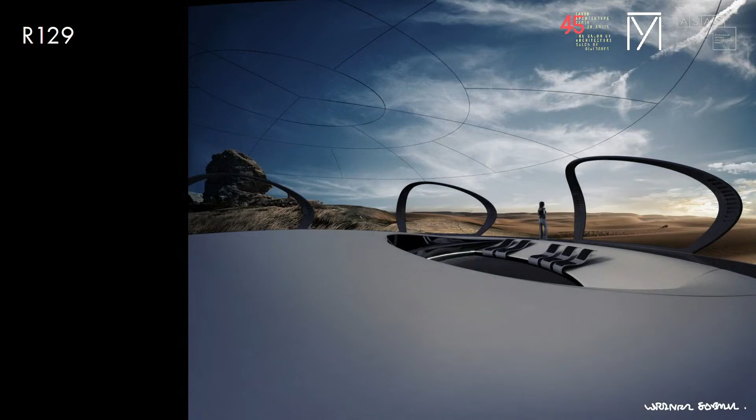At the same time, this glass has to achieve high thermal performance requirements, so it might need to be vacuum glazing to get the U value down, while also having structural performance to resist wind loading and so on. But I think only if we set certain goals for where we want to be in the future do we know where we need to work.